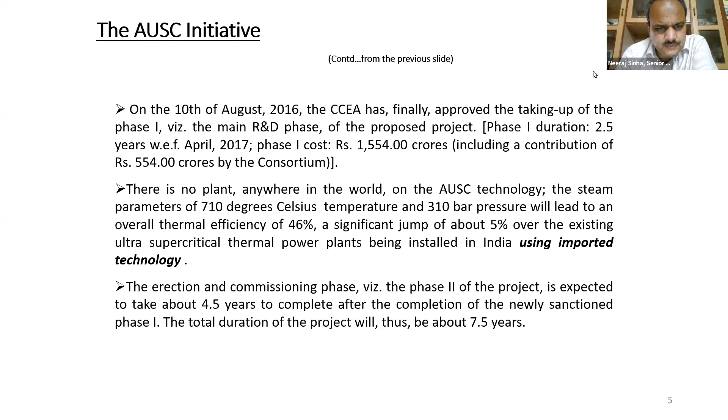And the DAE sanctioned a substantial amount, I don't remember the figure now, it was I think 234 crores for doing this job. And as I was saying, the initial estimate was that the R&D would take 2.5 years and the erection and commissioning of the plant would take 4.5 years. So we were looking at 7.5 years from the day of sanction. The day of sanction, as we know, is August 2016.

Now, this is a chart which Dr. Baldev Raj had put together. We keep showing it all the time. Subcritical sets were being installed routinely in the country in those days. The size typically is a 500 megawatt electrical set. The steam pressure is 170 bar, 537 is the steam temperature, 565 is the reheat steam temperature. Efficiency is as low as 38.5 and the specific consumption of coal is 560 kg per megawatt hour.

Now, as we go up the ladder, supercritical, the steam pressure increases, the steam temperature increases. Consequently, the efficiency also increases, and of course, the coal consumption goes down. Now, finally, the row in red is what we targeted. Around 310 bar of steam pressure, 800 megawatt electrical was the unit size. 710, as I said, was the entry temperature. 720 was the reheat temperature. And 46%. This was the efficiency that was calculated to be possible.

Of course, there were a lot of engineers who opposed this figure at that time, but then they all gradually came in line. And the coal consumption comes down to 467. Now, the footnote says for the 800 megawatt electrical AUSC, the reduction in coal consumption is about 5 lakh tons per year, which is really substantive when compared to a subcritical boiler.

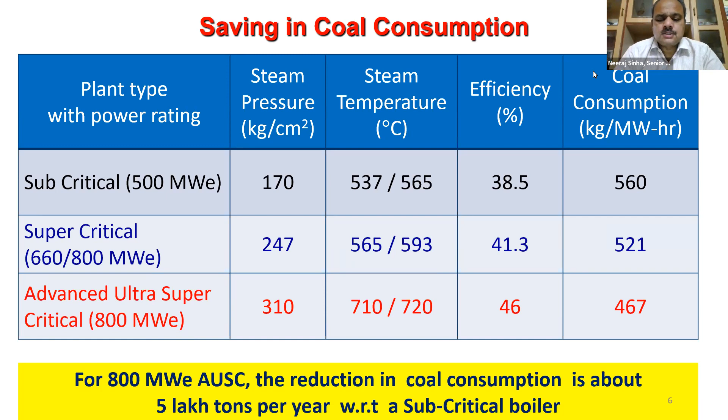Now, these are some of the materials issues that we identified almost 12 years ago now, in August 2010. The challenges were the design of the boiler, the design of the boiler tubes, the high pressure steam piping and the headers of the boilers, the superheater tubing, and of course the water wall tubing. Now the photograph here shows water wall corrosion in the set that was being installed at that time, and we had to fight this problem as well.

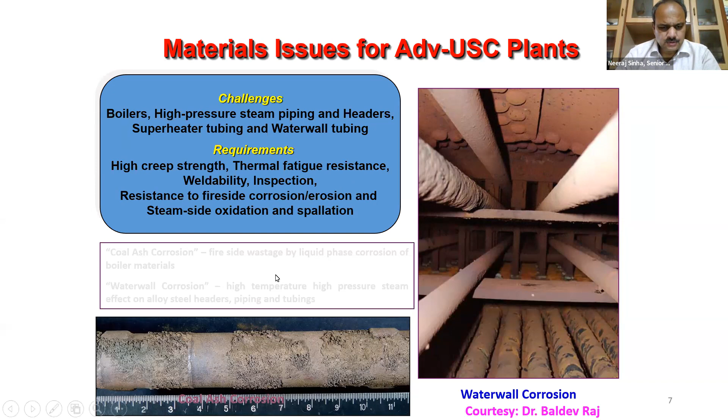And this of course is courtesy Dr. Baldev. Now this is the chart he drew, giving a broad framework of cooperation. IGCAR, as I just said, was in charge of materials design, materials development, materials testing. And all this work was supposed to feed into the design of the power cycle equipment, the systems engineering, the design of the steam cycle, and the test loops by BHEL. And it was supposed to feed into NTPC's work on the detailed project report preparation, on project management, and on O&M. So this is the synergy that we had thought should be there. And I'm glad to share with all of you that this did happen.

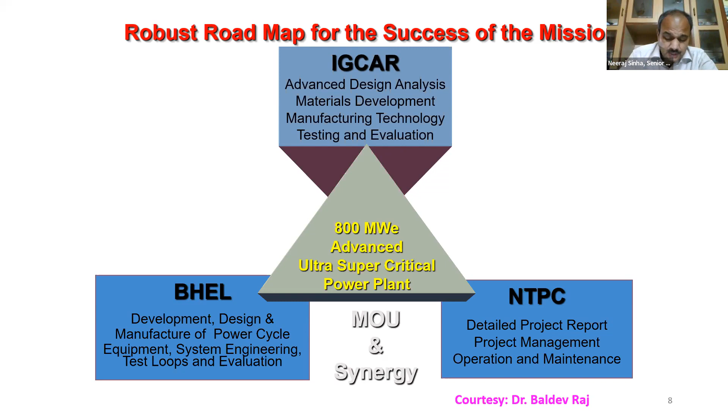BHEL and NTPC had never before worked together for such a long period on any technology development. BHEL was set up in the 50s, NTPC came in the 70s, so they had coexisted for almost 50 years without cooperating on any technology development for such a challenging job. This was a major achievement, and we worked as a team to achieve what we did.

Now, as I mentioned, these are the pre-project R&D activities that the PSA's office had sanctioned starting on the 28th of March. I will just touch upon the first one.

We involved Mishra Dhatu Nigam Limited in Hyderabad, and the Nuclear Fuel Complex, also in Hyderabad. Midhani was tasked to prepare a nickel alloy 617M, and a stainless steel, Super 304HCu as we called it. They did it wonderfully, making the material in-house through this project. The materials were tested, the tubes were drawn by NFC, and those tubes tested better than the imported versions coming from Spain and other parts of Europe. This was way back in March 2011.

The project lasted about 3 to 3.5 years typically. Some might have finished a little earlier, but most went to 3.5 years, and some even went to 4 years.

The others are equally important, but for paucity of time I'll not go into detail. The second project was equally far-sighted, because here we were talking about turbine blades made in a totally new material, difficult to machine, alloy 617M. Through this project, we demonstrated that BHEL had the capacity to machine turbine blades from a block of alloy 617M. The machining time per blade was about 4 hours, so we wanted to reduce that with time, but this was a big shot in the arm for all of us, proving we were capable of producing these turbine blades indigenously in India.

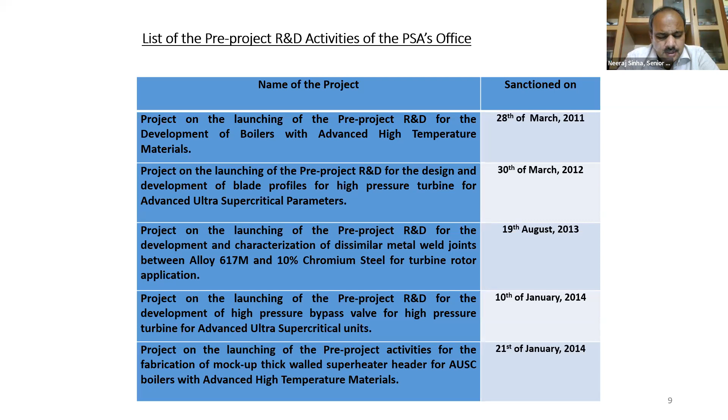Now why did we go for this? We could have had a turbine casing and rotor entirely with nickel alloy and not worried about 10% chrome, but that would have been very costly. Nickel is a very costly material, and that added to the cost of the project—even today it adds to the cost. So we wanted to reduce, to the extent possible by design, the use of alloy 617M in the construction of the turbine.

Now I'll just run through the others. The last of these projects was sanctioned on the 20th of February 2017, involving high velocity oxygen fueled spraying of chromium carbide-nickel-chromium coating on grade T91 boiler tubes. This was done by the Bhopal unit of BHEL, with full technological support from IGCAR.

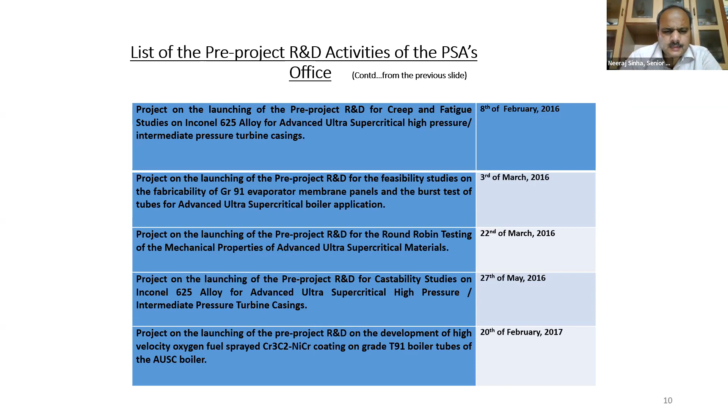As I was saying, all these 10 activities were targeted, number one, to gainfully use the lead time from the date of signing the MOU up to the actual sanction of the project, so that we could keep working and not disintegrate after the signing of the MOU. We also kept the consortium together, very actively, through these pre-project R&D activities.

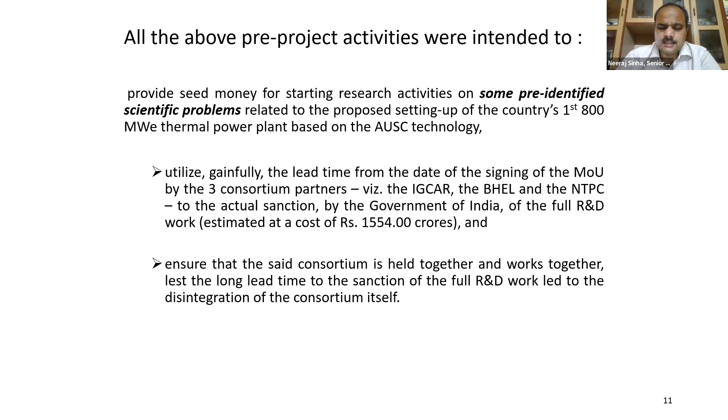Now just to remember fondly all those seniors who had contributed so actively and selflessly their valuable time on developing the technology by guiding and reviewing the project team. Dr. P. Rama Rao is the first person I should give my regards and obeisance to. He brought the PRMC, the project review and monitoring committee, which was only for those 10 pre-project R&D activities, not for the main project. The main project had a different review mechanism altogether.

Dr. Rama Rao led the committee with Mr. Chetal as a member, and the CMD of Midhani as another member. Dr. G.K. Dey, at that time when this committee was formed, was the head of the Materials Science Division.

Then he became the group director of the Materials Group, and now he is superannuated. This was his designation in those days. Dr. Choksi, professor in the Department of Material Engineering, also contributed heavily, and I was the member secretary to the committee.

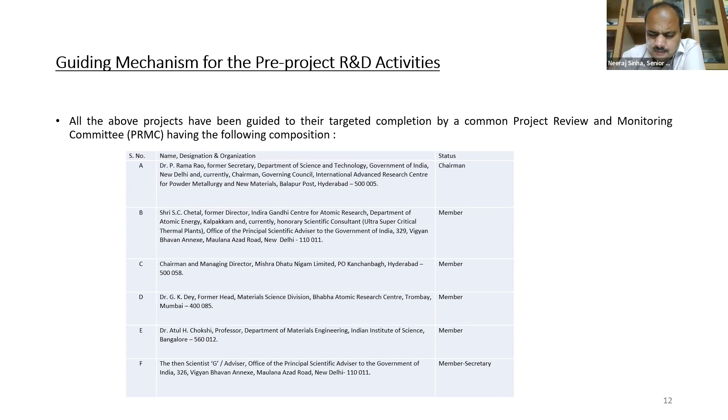Dr. Rama Rao realized in the very first couple of meetings of the PRMC that this work was going to be difficult, not because of the technological challenge alone, but because of the very tough task of bringing BHEL and NTPC together. Although both are equally valuable to the country and both are Maharatnas, we could see between them the buyer-seller relationship - the NTPC buyers and the BHEL sellers. So it became a little difficult for us to digest, because this is not the way we do research. No one does research this way. Everyone is supposed to be an equal partner.

But gradually they came around and were able to contribute in a fairly short period of time whatever they were tasked with. So what Dr. Rama Rao did was, he knew he could not meet very frequently because he had some constraint on travel in those days. We had to meet in Hyderabad since he's Hyderabad based. So he formed a subcommittee.

We called it subcommittee 2. There was a subcommittee 1 under the chairmanship of Dr. G.K. Dey, which was supposed to submit a report on materials development, which they did. Subcommittee 2 was chaired by Mr. Chandan Roy.

But then, as I was saying, he left us in 2016 itself, and then Mr. Chetal took over. He was the co-chairman earlier, then he became the chairman - the director of engineering R&D of BHEL. Mr. D.K. Dubey is now retired; he used to be the regional executive director of NTPC Limited in Hyderabad. So they were representing the two main partners. And of course, the PSA's office was supposed to be the secretariat to this committee.

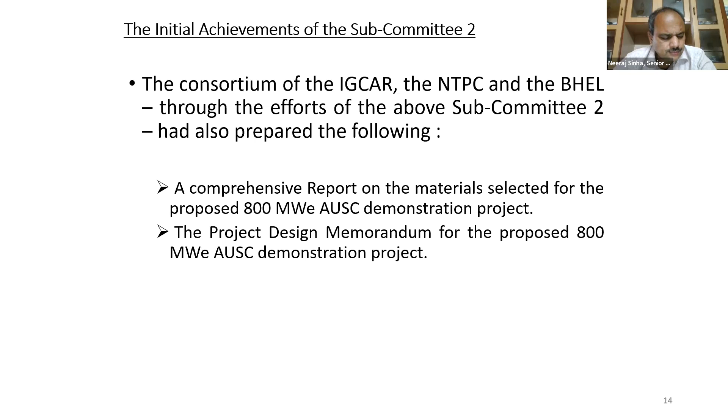There were some achievements we asked the subcommittee to work for, and they did that. They created a comprehensive report on materials selection for the 800 megawatt electrical demonstration project, and they also created a project design memorandum for the same project. All this was done way back in, if I remember correctly, 2013-14 - in fact, January 2013.

Now I'll come to the main project, and then I'll go on to the achievements that were made. The main project was sanctioned in August 2016 for implementation beginning from April 2017 at a prospective date. The entire cabinet note was drafted by us, meaning the PSA's office, and the then CMD of BHEL, Mr. BP Rao, and of course Mr. D.K. Dubey and Mr. Chandan Roy from NTPC, and Mr. Chetal from IGCAR.

The second level was the mission directorate. The mission directorate was set up with Mr. S.C. Chetal, who was selected through a diligent selection process, chaired at that time by Dr. Chidambaram. He was selected to be the mission director, and the mission directorate was funded by the Department of Heavy Industry, because when the cabinet approval came, the money flowed into DHI. The contribution from the Government of India flowed into the Department of Heavy Industry, and from there into BHEL, NTPC, and IGCAR, as the case may be. They funded the setting up of this mission directorate in Noida, and the mission directorate was functioning until March 2021, when we wound up after completing the entire work.

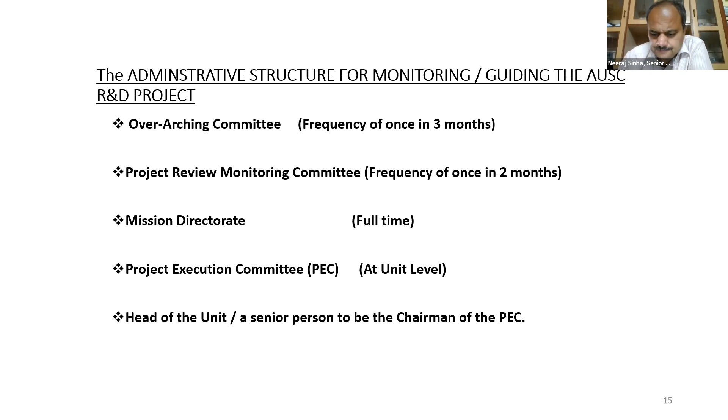And the mission director was the member secretary to this committee. Now, what were the broad activities?

Now, the first bullet is the design of components impacted by the AUSC steam parameters and the design review of the key components by foreign experts.

What I mean here is after the design of the boiler and the design of the steam turbine were completed - the boiler by BHEL Trichy, and the steam turbine by BHEL Haridwar - we had both these design documents validated by foreign organizations. The boiler design was validated by EPRI of the US, and the turbine design was validated by Siemens.

Now, it was quite an uphill task to get BHEL to agree, and there were a lot of concerns on IP, because even leave alone Siemens, no country in the world has actually designed and operated anything at advanced ultra supercritical parameters. The reasons could be many. It is not that they lack the technical expertise. It is likely that governments the world over, especially in the Western hemisphere, are gradually receding from coal as a source of power and going into alternate sources of energy.

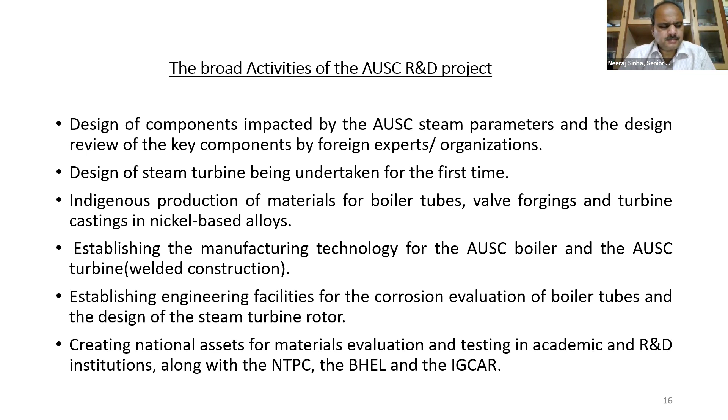For example, there were projects done by IIT Madras, projects done by CSIR labs, and in each of these, BHEL and NTPC had actively participated. There's quite a lot of projects - I don't have the full list here. I didn't show it on purpose, but there were quite a lot of projects that were implemented at the back end.

Now, India's need for AUSC, this is very obvious. I will not spend time on this. As I was just saying, the coal consumption comes down fairly substantially, and emission also comes down substantially, and the efficiency goes up. 46% is a quantum jump again, because the supercritical sets and the ultra supercritical sets that are currently being installed by NTPC based on imported technology have a maximum efficiency of 41.5%. I'm talking about the overall thermal cycle. Maximum efficiency of 41.5%. And we are talking about 46% here.

So now it appeared at that time, and as far as I'm concerned, even today, we can fulfill our obligations to the world. Not that we will stop burning coal. We should continue to burn coal because coal is our mainstay. And the US continued to drill for shale gas once they discovered it, I think around 15 years ago, without worrying for the environment. They exploited it to the extent possible because they were saying that this is our resource and we are going to use it the way we want.

I don't know why we are shying away from using coal. I agree that we should behave responsibly. We cannot pollute the environment because our future generations will be at risk. Why future when the current generation will be at risk? But let us burn coal as efficiently and as responsibly as possible. So when we talk about thermal efficiency of 46%, you obviously talk about reduced emissions, and you obviously talk about reduced coal consumption as well.

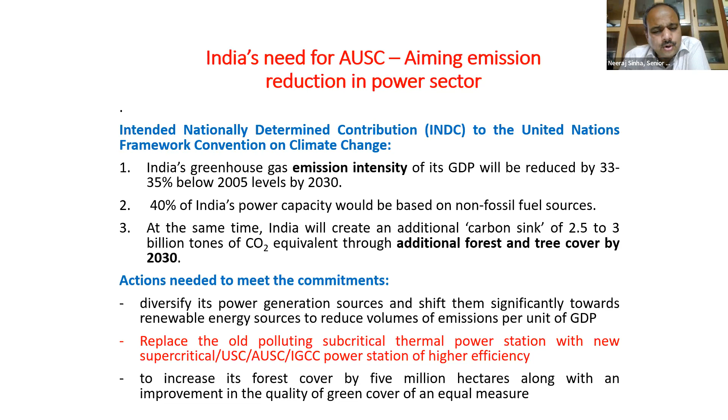And the third and the most important point is, other than the benefit to the environment and the rise in efficiency, we are also looking at the possibility of India building an industry through BHEL and through all its auxiliary companies, a world leader in AUSC technology development. We could end up supplying AUSC boilers, AUSC turbines, AUSC piping, AUSC valves to at least our neighbors for the time being, and maybe to the rest of Asia as well.

Now, coal to remain integral to India's energy security, I just said that. Now, India has a great push for renewable energy, as we all know. We are predicting a 40 to 45% energy mix by 2027. However, the cyclic behavior of RE, that is renewable energy, again calls for baseline capacity of coal-based generation for stability. That is number one. Number two, when we made this slide, COP26 had not happened. So now we know that the Prime Minister has declared that India will be carbon neutral by the year 2070.

And not by any yardstick of imagination, engineering calculation, engineering design, can we achieve that target based on renewable energy alone. Nuclear energy is going to play a big role. There is a parallel activity being done by the NITI Aayog under the chairmanship of the Vice Chairman NITI Aayog on the development of small modular nuclear reactors. And the report of that committee will come out shortly. And as the president of the Indian Nuclear Society also said, all forms of energy are important. We need to see how we use them and what is the energy mix that we come up with.

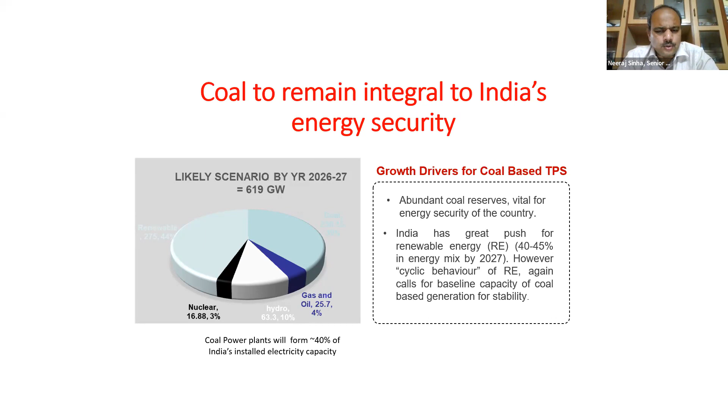So coal burning in a way in which we are able to reduce emissions to the extent possible should remain a part of the energy mix. We cannot do it without coal. And I remember the PM making a similar statement in COP26 when I was in Glasgow. Now, this is, of course, I've been telling about this. So this also I have said.

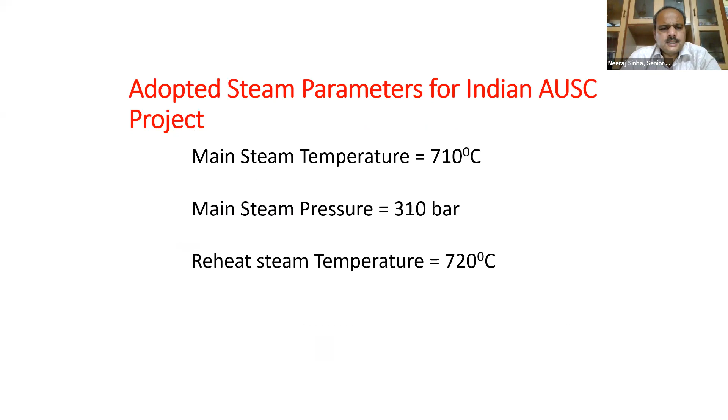Now, these were the areas of the work identified. The first two bullets I've already spoken about. The manufacturing technology also I've spoken about, of the turbine rotor and casing with new materials. Alloy 617M, the M is missing there, alloy 625M. Now, production of alloy 625M casting for turbine inner casing, manufacturing technology of the materials to be used in the boiler, material data for the design of various components, both through lab testing and through open literature, was to be collected. And the fireside corrosion testing I've just said.

And of course, the other major thing that was done was, these two items were funded by the DST. That talks about the cooperation we got from almost every quarter in the government of India. The second last and the third last bullets, the work there was funded by the DST to the tune of about 100 crores. And this was thanks to Dr. Baldevraj when he saw that despite our best efforts, the entire R&D work was not seeing the light of day because of the cabinet approval not coming through. He had spoken to the then Secretary DST, who had initially agreed for a smaller sum. But when he understood the enormity of the work, he very generously gave 100 crores for this work.

So this turbine rotor test facility has come up already. It is functioning now. And it is also a first of its kind in the country, and it could be the world over, but I'm not very sure about the world over part. It is where we are actually planning to test at actual RPMs the AUSC rotor as and when it is made. Pending that, the test facility has also been operated with a casing made of steel, and this has come up in the corporate R&D division of BHEL in Hyderabad.

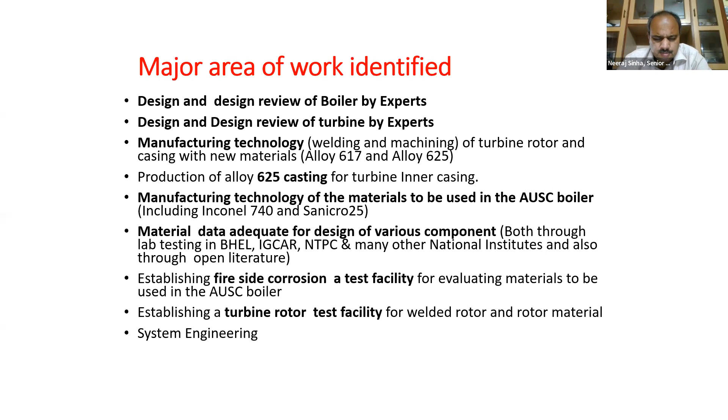Now, these are the material selection basics. We know that adequate mechanical strength at design temperature, high tensile and creep properties, adequate low cycle and high cycle fatigue resistance, reduced embrittlement, etc. were to be studied. Corrosion resistance was studied not only from the scaling point of view, but also from the water chemistry point of view.

Weldability and manufacturability of all the components was established. Physical properties, that is higher thermal conductivity, higher thermal diffusivity, and other properties like low thermal expansion coefficient were all measured through experimental work. Availability of materials in required sizes was ensured, and overall economics, of course, was an important part.

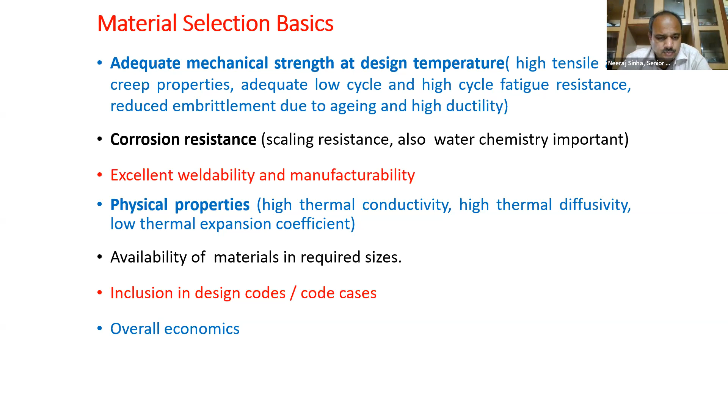Now, this talks about a comparison of T91, which is the normal boiler tube that is used currently in supercritical and ultra supercritical sets, with the high temperature materials. Now, 740 is something we have not used so far. We might ultimately do that because Inconel 740 is patented by some company in the US, and we didn't want to touch that because the patent is still live.

So 617, 625 are the materials we selected. Sanicro we selected as we matured doing the R&D work, and E911 also came up after we matured a little. Sanicro and E911 were primarily brought in to reduce 625 and 617 to the extent possible, which were of the costlier nickel variety.

Now, we also said that we need to give economics an important consideration because ultimately, and this is not at the cost of structural integrity, of course, all these plants should be commercially viable and should be multiplied in numbers over the years. So we didn't want to create something which cannot be sold to customers or which cannot be established at a techno-economic level.

So now, as I said, the reduction in usage of expensive nickel-based alloys: for the welded rotor and casing, we brought in E911 and G911 as a partial replacement to Inconel 617 and 625 respectively. Then replacement of Inconel 617 by 740 for boiler tubes. We didn't do it as a part of this project, but that is a plan. Replacement of Inconel 617 by Inconel 740 is again a plan for the main steam piping.

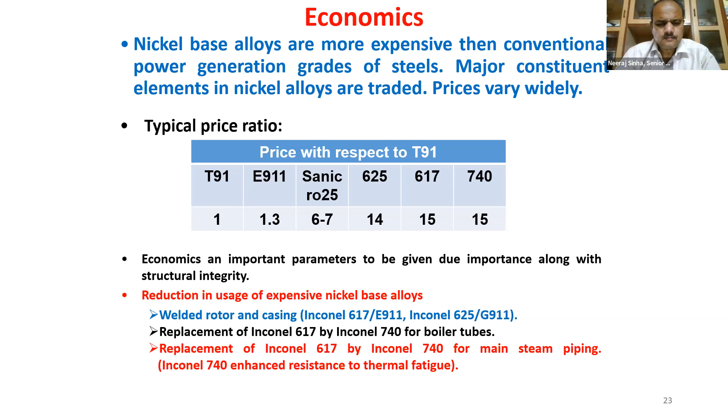Now, these are photographs. I'll show the photographs later. I think these are the smaller versions. There were several global firsts, and some of them I have already highlighted here. The first bullet I've been telling, second bullet is well known. Now, state-of-the-art design completed for the first time for a steam turbine in India. Design review of boiler, turbine and valves was done by external experts, EPRI, GE and Siemens. Manufacturing technology at industrial scale was established for the turbine, the boiler, the piping and the valves.

Now, these photographs will show all that. I'll come to the photographs later. And this R&D in no way was the typical R&D we think of at the lab scale or the pilot scale or even at the demonstration scale. These components that you see on the right were made at 1:1 sizes, were duly tested at whatever standards were available, and were certified to be withstanding all the tests as per the standard. So it was, in fact, way beyond R&D.

Now, indigenous production of nickel-based alloy tubings, forgings, and the world's heaviest casting. The world's heaviest casting was done by the Central Foundry and Forge Plant of BHEL in Haridwar. And we were all there, by the way. When the casting was taken out of the furnace and submerged in water for cooling, we had seen that ourselves. In the bottom row, left-hand thumbnail, you can see the world's heaviest casting in nickel-based alloy 625M by BHEL. And there are several other firsts. I've listed some of them here.

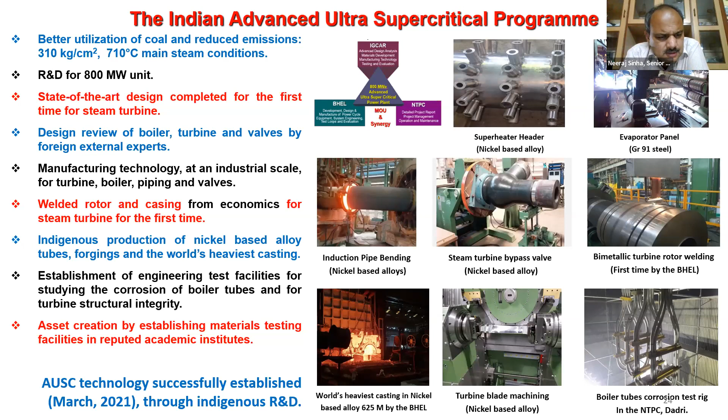As we go along, the design approach, of course, I've been talking about this. Experimental design validation in challenging design areas like turbine rotor, all these things were done. And finally, economics, this was also looked at. Scientists are often blamed for not looking at economics, but we did that as well.

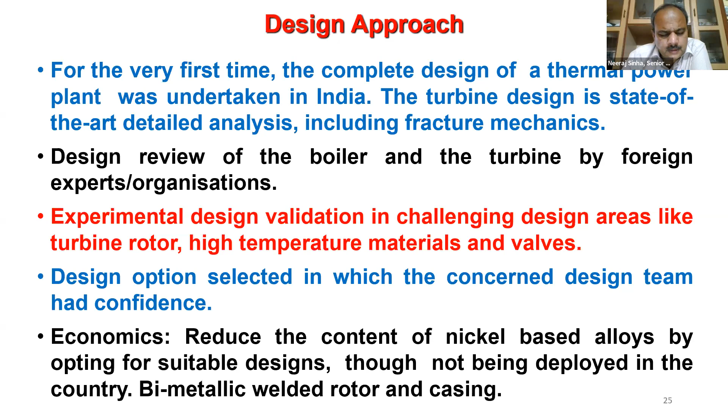And we reduced the content of nickel-based alloys by opting for suitable designs, and although it's not being deployed in the country, we have done that. And bimetallic welded rotor and casing I've already spoken about, where we are retaining 10 chromium to take care of the heavy expenditure on 617 and 625M.

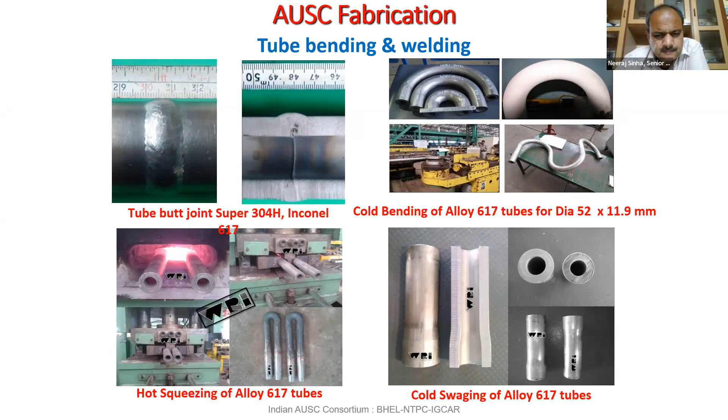Now, all this work was done primarily in the IGCAR and the BHEL Trichy, and part of it in corporate R&D of the BHEL in Hyderabad, and a few other units. For example, there is a piping unit of the BHEL in Thirumayam, if I remember the name correctly. Not very close to Madras, but that is where we take the road journey from. So they have a piping unit there, and the bending of pipes was done there as well as in the Trichy unit.

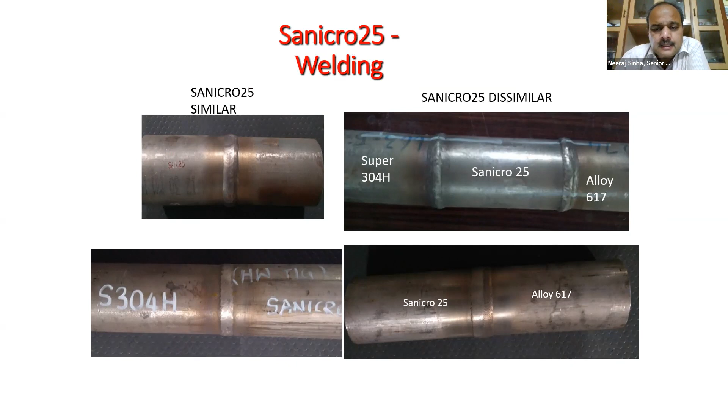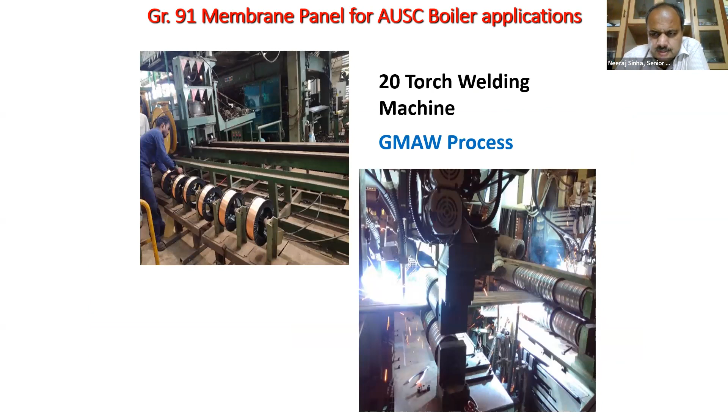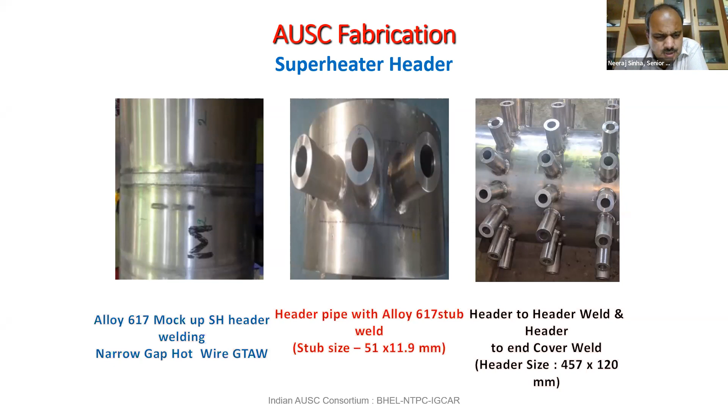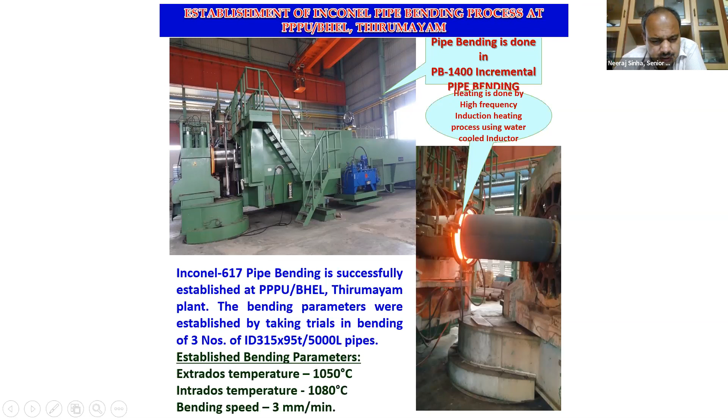By the way, if any of you happen to visit BHEL Trichy or BHEL Haridwar, or even corporate R&D of BHEL in Hyderabad, all these components are still there, and you can see and feel them for yourselves.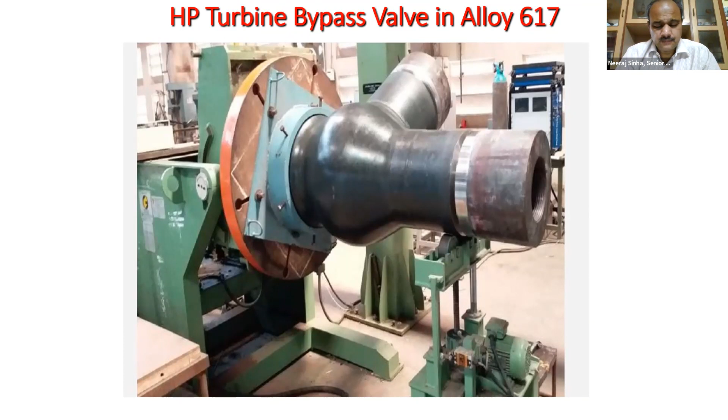Now, safety valves, of course, were an important component, but they were successfully completed again by BHEL, the superheater safety valves. Now, the welding equipment: there was a special welding machine that was purchased under the project out of the 900 crores that came from the government of India. And this was established in BHEL Haridwar. So here you see the welding of the rotor, and in the same way, the welding of the casing had been done.

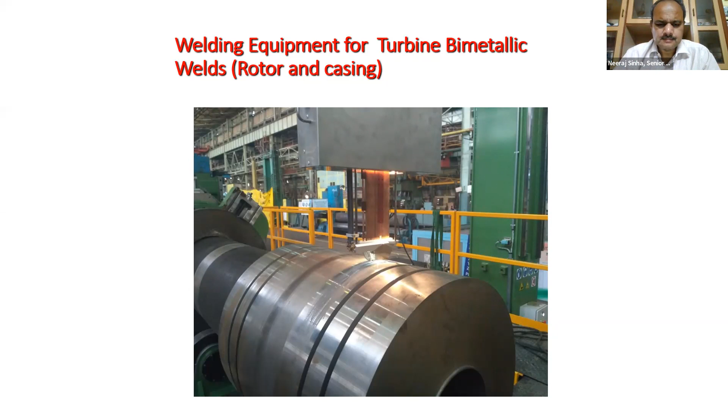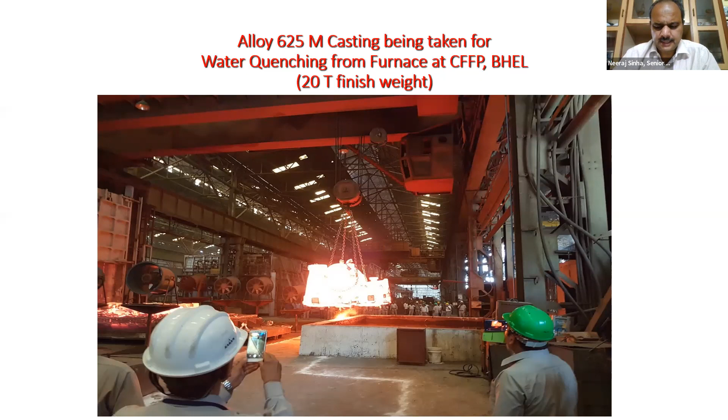This is the first weld of the IP turbine rotor. And now this is the casting that I was talking about. We had taken this photograph and we were there in the shop. So this is a 20-ton finish weight casting, and it is alloy 625M, and it is being submerged in a water tank for quenching. And this is a kind of a world record. No one has ever done this size, and they did it successfully, by the way, without any cracking or without any other materials related problems.

Now, these are the turbine blades, the other important thing which was accomplished by BHEL Haridwar. The blade material came from Midhani, and the machining of these blades, which you see on the right-hand side, was done in this 5-axis CNC machine, which was again purchased under the project. BHEL had 3-axis and 3.5-axis machines. They didn't have a 5-axis one, and you can see that a blade is loaded here.

And by the way, from 4 hours per blade, we were able to reduce through this new machine the machining time to, I think, hardly 30 minutes per blade, or maybe slightly more. I don't remember the figure now, it's been a while, but it was definitely less than an hour.

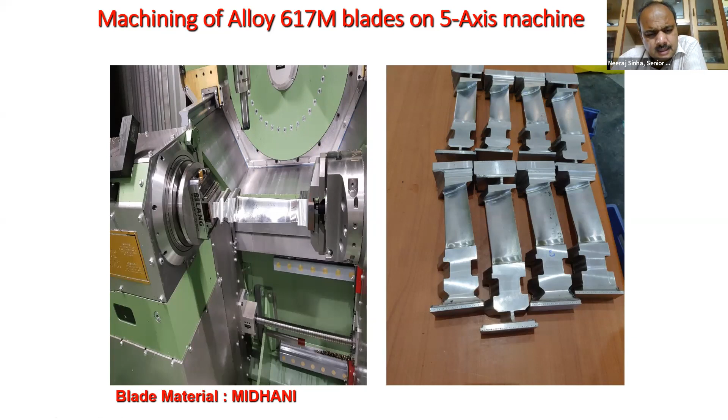Now, this is the test loop which was set up in the Dadri unit of NTPC. And this was a 210 megawatt thermal power plant. The loop was constructed specifically on a design given by IGCAR, and the construction was done by BHEL Trichy. And you can see the loops. There are 4 loops here, and each of these were exposed to the steam that was coming from the boiler.

A part of the steam was taken out from the boiler and fed into the steam pipes, pressurized, and the temperature was increased to advanced ultra supercritical parameters. And there was no degradation. I mean, degradation with time is fine, but there was no untoward degradation which was not designed for. It was established that these materials can function in a real power plant atmosphere as well, other than in the lab, that is in IGCAR.

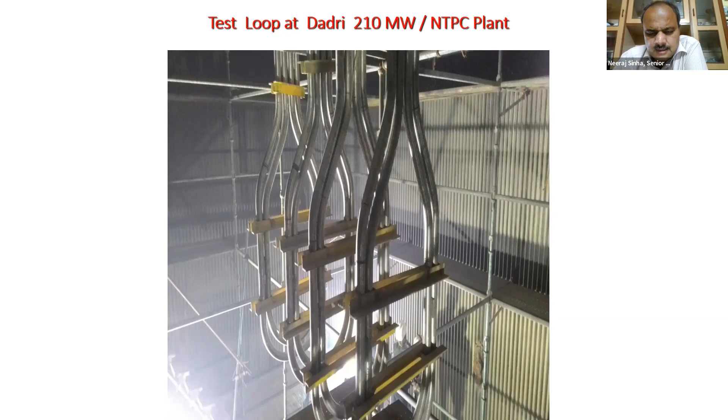Now, this is the turbine rotor test rig that I was speaking about. HTSTR stands for high temperature spin test rig, if I remember correctly. It is written there. And while you see it above ground, actually this whole thing went inside. There was a proper cavity constructed in one of the units of BHEL, and this all went below the ground level.

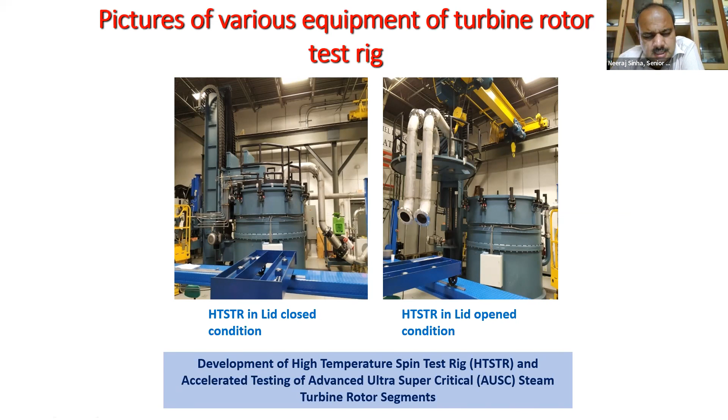This is the casing that houses the turbine. Then it rotates at the design speeds, and all kinds of material properties are tested at that high speed. But of course, we are yet to do it for the AUSC turbine, because the turbine has not been actually made in industry. The demonstration, dissimilar welding, everything has happened, but the turbine has not been made because that needed money, and that kind of money we didn't have.

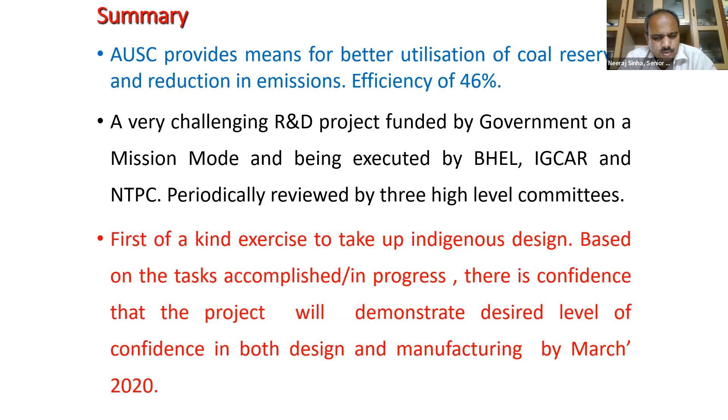Now, this gives a summary of the AUSC work. It provides a means for better utilization of coal reserves, which I've already submitted to you. It's a very challenging R&D project funded by the government on a mission mode, and it was executed by BHEL, IGCAR, and NTPC. We say being executed because we still are trying to hold the consortium together, but I don't know for how long. It's a first of a kind exercise to take up indigenous design. There was confidence that the project would demonstrate the desired level of confidence on both design and manufacturing by March 2020, but finally it got a little delayed. It ended in 2021.

Now, the lessons learned are obvious. We were able to establish that in India, not only are we able to design, but we are also able to manufacture important components of an 800 megawatt electrical AUSC technology-based thermal power plant totally indigenously, with absolutely no help from any country, any consortium. In fact, we were approached by the US consortium.

This I forgot to tell, and this was about the time when we started the R&D. News spread that India is working on AUSC technology, and the US consortium, which is based in Ohio, approached us because they didn't have a power plant available for testing at high temperatures and pressures. They were developing Inconel 740, and they wanted to test it in a real power plant. We have the power plants here; the US doesn't have them any longer. But as Dr. Chidambaram used to say, we need to leverage international cooperation, and it has to be a win-win situation. We had nothing to win from the US consortium, so that didn't go ahead.

Now, the other important point which we were able to demonstrate was that the design withstood the scrutiny by world leaders like Siemens and EPRI. And in fact, they were very appreciative of the work done. Of course, they had quite a few critical comments which were taken care of, and the designs were gradually included.

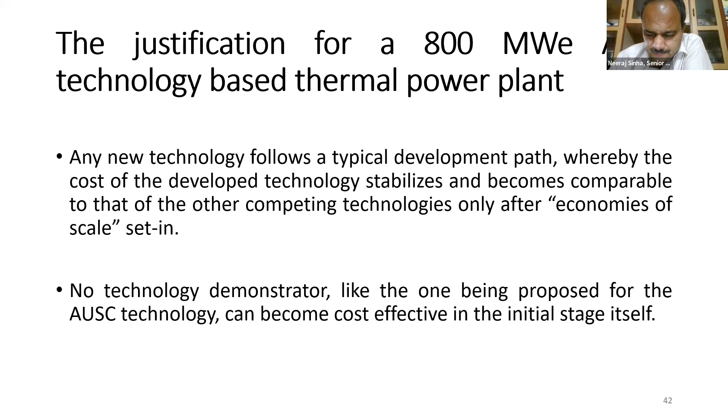So now this is the last, and I'll not go through the other slides because they are a justification for the 800 megawatt electrical AUSC technology-based thermal power plant. Now, these we have put together only to convince the powers that be why we should go in for the AUSC and why we should not continue running after RE full-time or running after any other alternate energy full-time. So if there are questions, I can definitely answer these questions. These are quite a few slides that we put together.

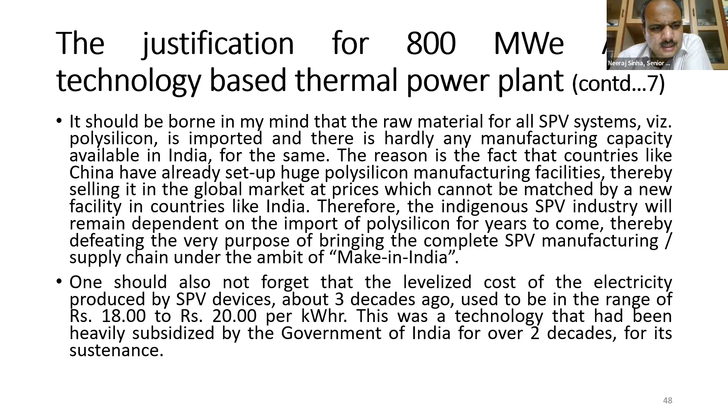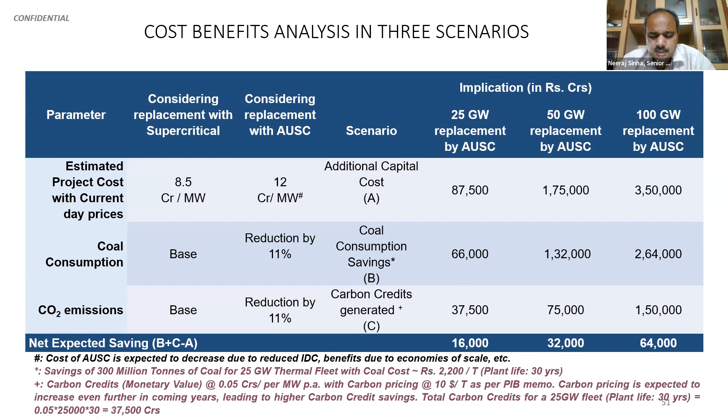So ultimately, we wanted the business model to include 6 crores per megawatt from NTPC, like they do for any supercritical power plant, and the balance 6 crores coming from the government of India as a grant. So 6 into 800, we are looking at a grant of 4,800 crores from the government of India. Now we are talking about 25 gigawatt replacement, 50 gigawatt replacement, and 100 gigawatt replacement. AUSC can as well replace all the old thermal power plants that have come to the end of their lives and that are extremely polluting, by the way, and are highly inefficient. If you don't want to go in for newer ones right now in a big way, we can use this technology to replace the existing ones.

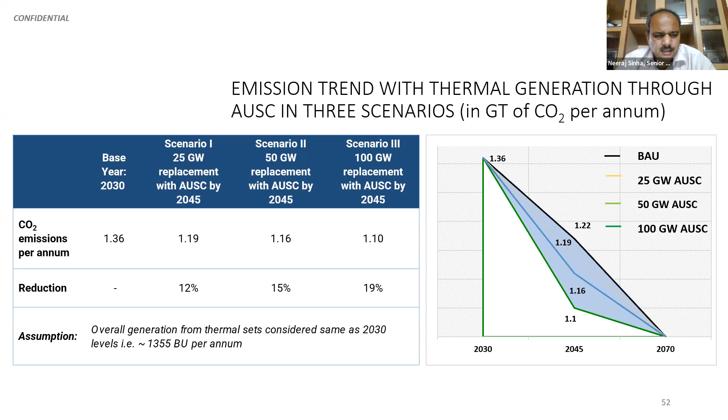And of course, this is the emission trend, which is obvious. The emissions come down with the AUSC replacing the supercritical sets. And thank you for your kind attention. That was the last slide.

So let me stop sharing. Should I stop sharing or should I leave this on? Yeah, you can leave it there. Okay. So I hope I have kept myself in the time. It is 6 p.m.

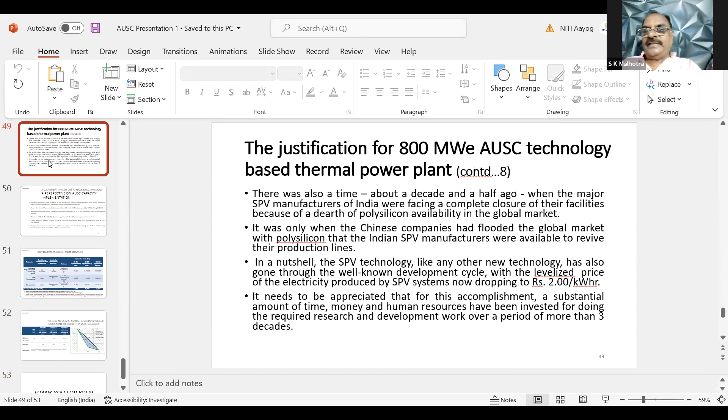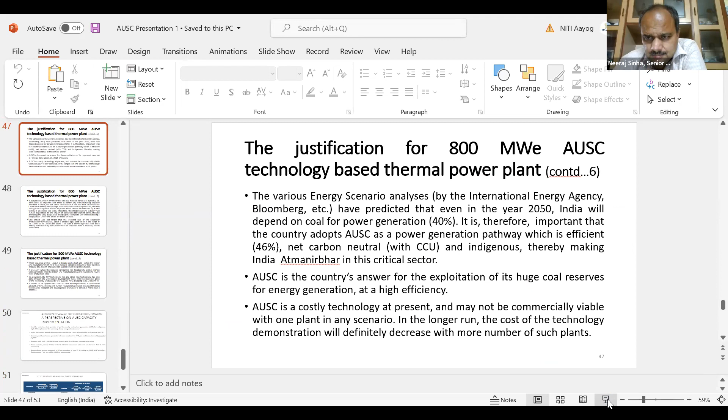So whatever technology we may develop, there is going to be emission from this plant. And net zero doesn't mean that nothing will emit carbon dioxide. You can emit carbon dioxide, but then you have to capture that carbon dioxide or some other carbon dioxide, so that the carbon dioxide emitted by you and captured by you will decide whether you are net zero or not. So my question is, what is the work going on or thinking going on in Niti Aayog about carbon capture technology and sequestration technology? Thank you so much.

A very relevant thing you raised. I had skipped this slide because this was the justification part. Now, the Niti Aayog had conducted a national workshop where there were three international speakers also on carbon capture, utilization, and storage. We had looked at all the possibilities, including underground sequestration and fixation in biological formations, and of course putting carbon dioxide for enhanced oil recovery and for other useful applications without actually allowing it to escape from the chimney. Now, as you see, the various energy scenario analysis by the IEA is talking about India continuing to depend on coal, that too 40%.

I don't know how much to believe this for the year 2050. So we have already identified that without carbon capture, utilization, storage, net zero will not happen. And we have to heavily invest in CCUS to ensure that we are net zero. Otherwise, we'll never be net zero. The emissions will obviously be there as long as we are generating using coal. So to answer your question, this is already on the map of Niti Aayog, and Dr. Saraswat is leading it from the front as the member of Science and Technology.